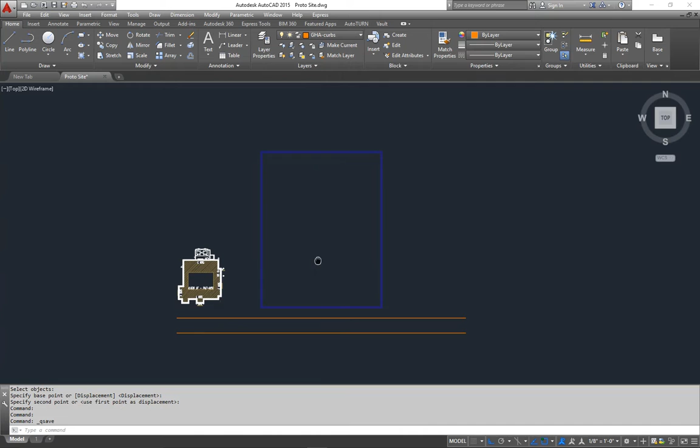Alright, here is a property line, and it's nice and perfect and square, and I made this just the right size for this building to fit on it. This is the road, the main road that you'll be accessing from. So the first step that we want to do is to allow for some green space.

We're gonna go in and figure out where our drive aisles need to be, and in order to do that, you want to take into account the landscaping area that's going to be around the edge of the site, and then you also want to take into account 6 inches for a curb line, and then we'll go from there. So to start this out, I want 5 foot of landscaping around the sides and the rear, and then I want 10 feet around the front.

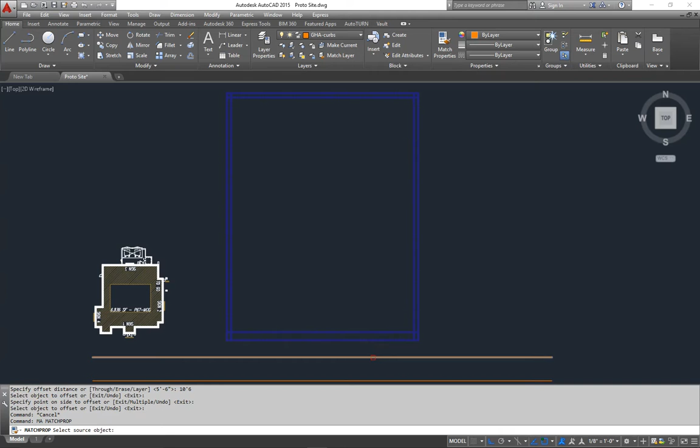So I'm going to offset 5 foot 6 inches and come in on the sides and the rear, and then I'm going to offset 10 foot 6 inches on the front, and then I'm going to use the match properties command to put those on my curbs layer. So this would be the head of parking that's going to be there.

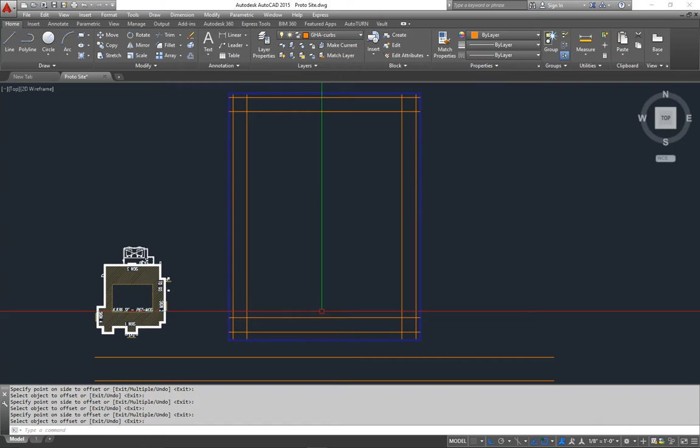So our parking spaces are going to be 9 foot by 18 foot, so I'm going to offset 18 foot to allow for parking all the way around the perimeter, like this. Then our drive aisles are going to be 24 feet. So I'm going to offset 24 feet and come in like that. So that's a drive aisle going all the way around the edge.

Now at this point, to keep this from being too confusing, I'm going to go back in and erase these first lines that I offset, just so that what you're seeing here is our drive aisles. That's what we're trying to do right now, is find the drive aisles.

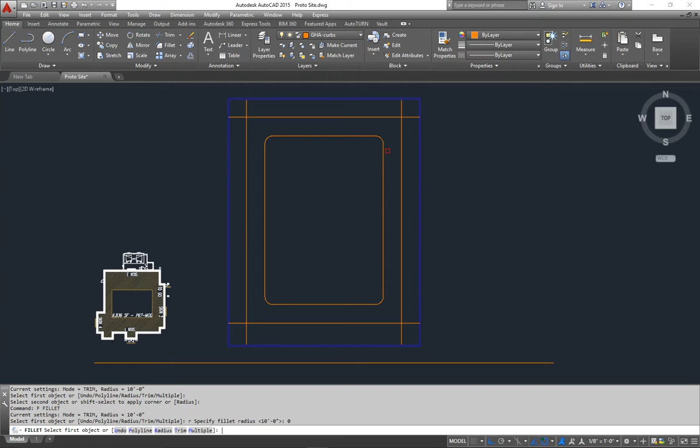So I'm going to put a 10 foot radius turning around through the drive aisle. So fillet radius 10 foot. And then we'll just put those on each corner. And then to clean these other ones, I'm going to set my fillet radius back to 0 and just make those little corners like that.

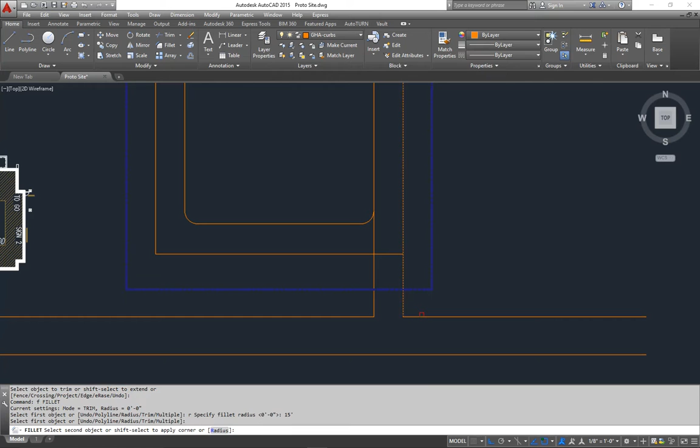Okay. Now, we're going to want an access point to the site. We call this a curb cut. So I'm going to do an extend out to this point, and then extend those lines to here. And here all we got to do is trim this out, and I'll put a 15 foot radius. So fillet radius 15 feet there, and then I'm going to trim this out, fillet radius 10 feet. So that gives us an access point to the site, a curb cut.

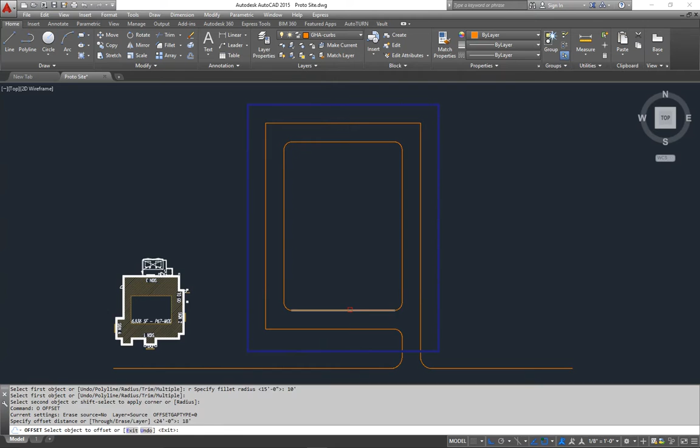Okay, now here's where we're going to want the building to go in the middle. Now we're going to want a row of parking across the front, so I'm going to offset 18 feet in the front, and then we're also going to want parking on both sides, so I'm going to offset 18 feet there. And then within that area we're going to need sidewalks, and when you're coming in at the front of a parking space like that, we want to do 7 foot sidewalks.

So we'll have to allow 7 foot and 6 inches for the curb line. So I'm going to offset 7 foot 6 inches. And then I'm just going to come in like that. So that shows where that's going to be. Now that would be the edge of our sidewalk at this point. So I'm going to want about 5 foot of green space or landscape area around the building. So I'm going to offset 5 foot. And this will just give us a visual reference as to where we want to stay within with the building.

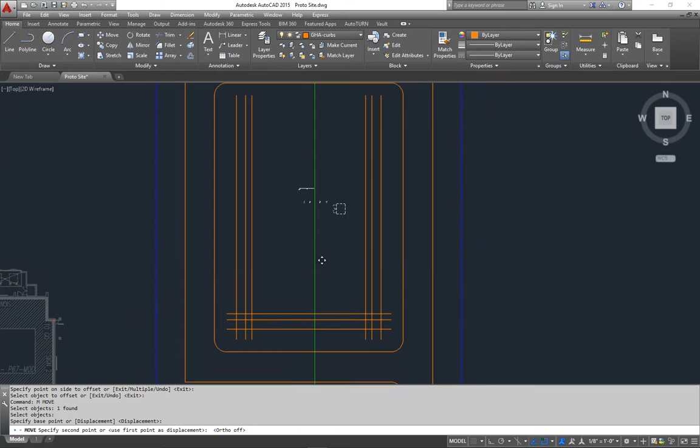So now I'm going to go over here and get the building, and I'm going to move this, and I'm just going to pick it in the middle, turn off my ortho, and just kind of drop this in the middle here and see where it lands. Okay, so see, I can push this forward a bit, and I can push this over a little bit here.

Yeah, and see, we've got a little bit of extra room over here, so I'm just going to kind of slide that over just a little bit, just to center it on the pad. Okay, so that's all that. I'm going to go ahead and erase these lines just to get them back out of my way.

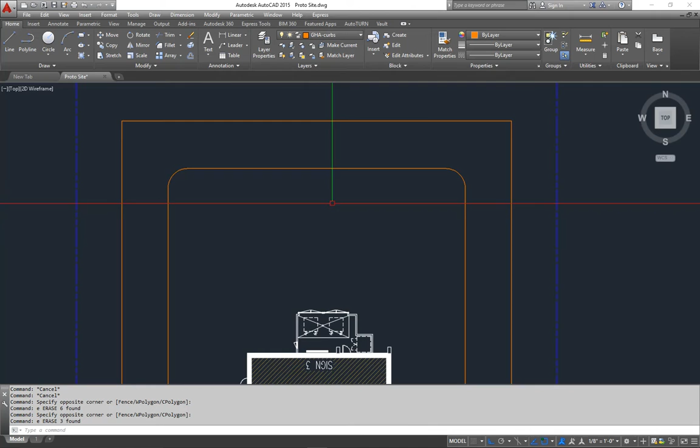Now in the back here, you can see we've got a lot of extra space, so we're going to add more parking in the field back here, and we'll do what I call a double bay. It's 2 rows of head-in parking. So I'm going to offset 18 feet, and I'm going to do that twice, and then I'm going to offset 24 feet for another drive aisle. And then I'm going to extend those lines out this way and trim that out, and then fillet radius 10 feet so that I'm getting my drive aisle going around this way.

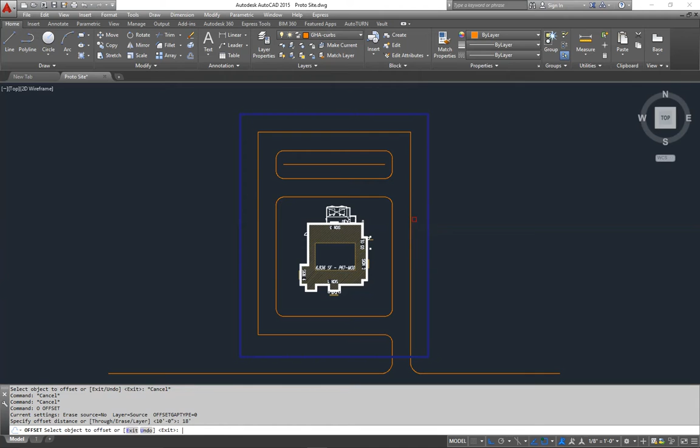So you can see here's the main road. We come in here, and these are all our drive aisles. These are rows of parking here. So to represent the rows of parking around the perimeter, I'm going to go ahead and offset 10 feet, or I'm sorry, offset 18 feet for a row of parking like this, to where we can see where those rows of parking are.

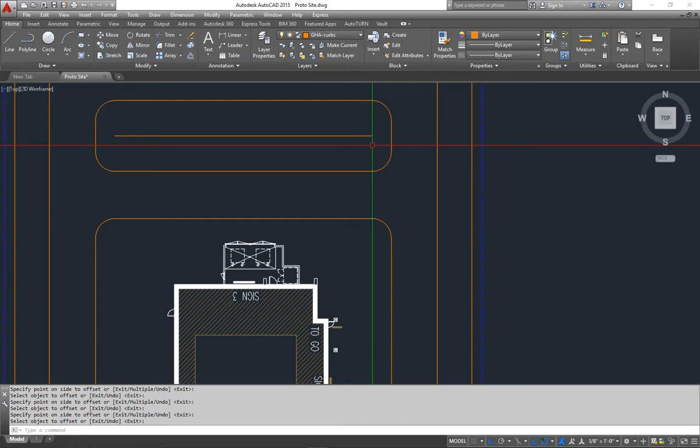See, I always like to come back and do this, because after you've filleted these radiuses on the corner, it shortens this line, because this parking isn't going to come all the way out here. It's going to be cut short because of the radius. So when you get done with the radiuses, you come back and offset them, and you can get a better idea of where your row of parking is actually going to end, like that.

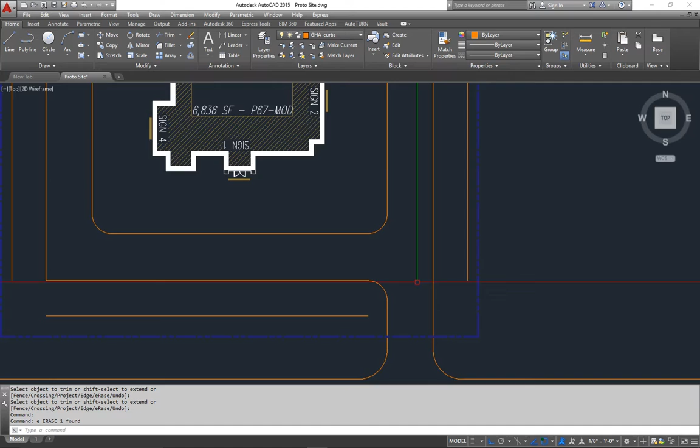Okay. Now this would be considered a driveway coming into the site, so we're not going to want to park all the way down in this area. I usually like to cut it off right about even with the drive aisle right there. So I'll just draw a line and trim this off from there, and then erase that. So you can see where all the parking is going to occur.

Now here, I'm going to go ahead and draw a drive up to our service yard and trim that out. I like to see if we can get a 10-foot radius on it if we can, and it looks like we can. So there's the access to the service yard. Now on the pad, I'm going to go ahead and offset 10, or why do I keep saying 10 feet? I'm going to offset 18 feet for our rows of parking. Looks like we might be able to get a little bit back here too. That one's getting a little tight. I probably won't do any right there.

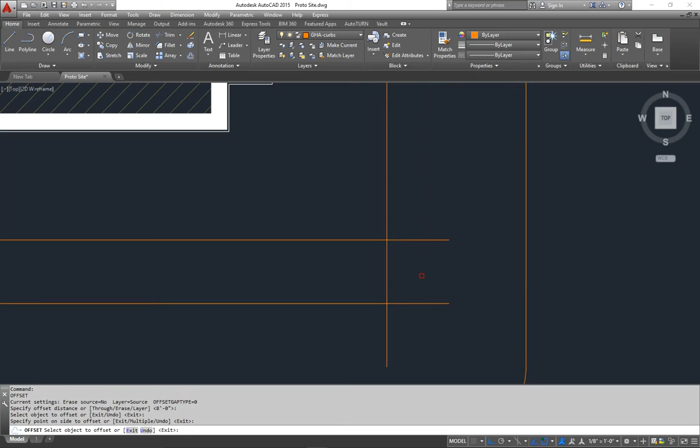Now, when we put a sidewalk in front of this, we're going to want the sidewalk to just go straight across right here. So obviously we can't overlap our parking. But if you account for 6 inches of a curb, and then a 7-foot sidewalk, and then another 6 inches of curb, that's going to be 8 feet. So if we offset 8 feet like this, and then trim this off right there, that's going to be an accurate representation of where that parking will end, and our sidewalk will be nice and straight going out right there.

So let's do the same thing here. Offset 8 feet and then trim this off. So there's where our parking will be right there. And I always like to try to get a full row across the front, so that we're getting as many spaces as we can, as close as we can to the front door. And then from here we offset and go back, and then from there, you know, get as many spaces back as you can, and then offset and go across the next row right there.

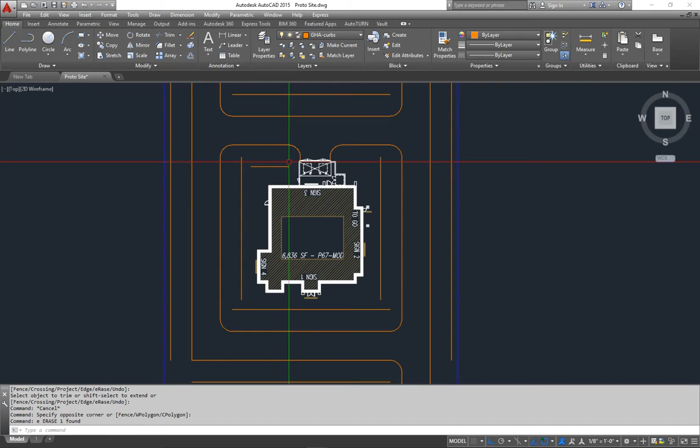So that pretty much sums up the blockout. From this point, you can go in and estimate the number of parking that you have based on how long these lines are. You know, if you list this line and it's, you know, 180 feet, then you can divide that by 9, because a parking space is 9 feet, and it'll give you a pretty accurate estimate of how many spaces are going to be here.

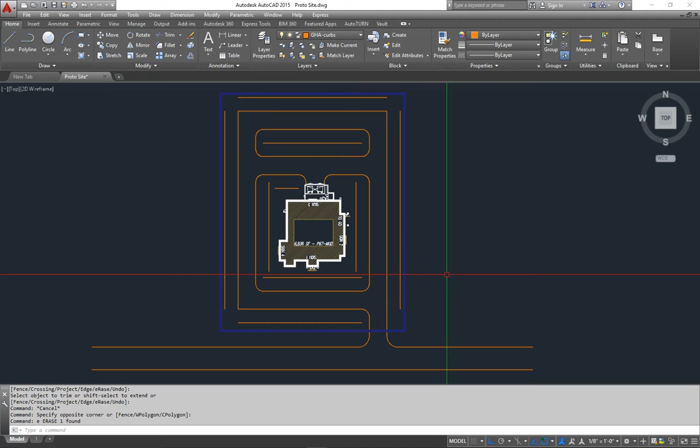So we know exactly what our site is going to look like with just a little bit of work and just a few lines, so that we can make sure that everything works out the way we want it to before we get into the next stage of cleaning all this up and drafting in all the graphics part of the site. So that's pretty much it.